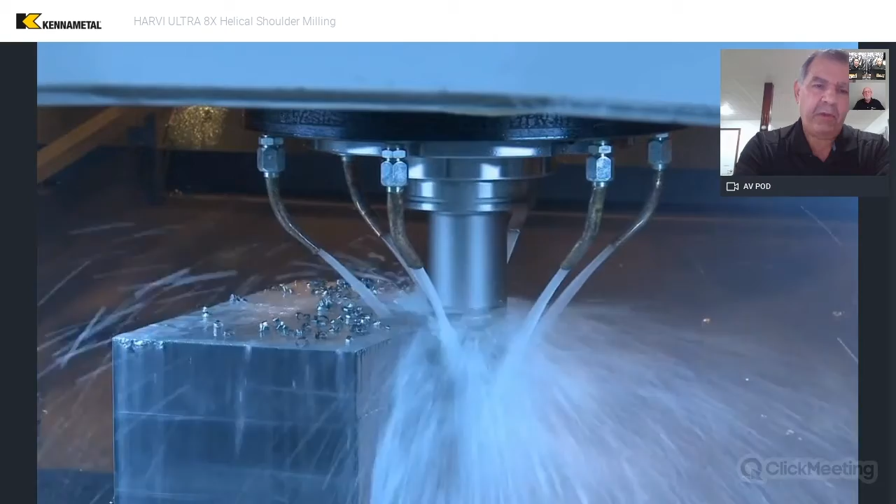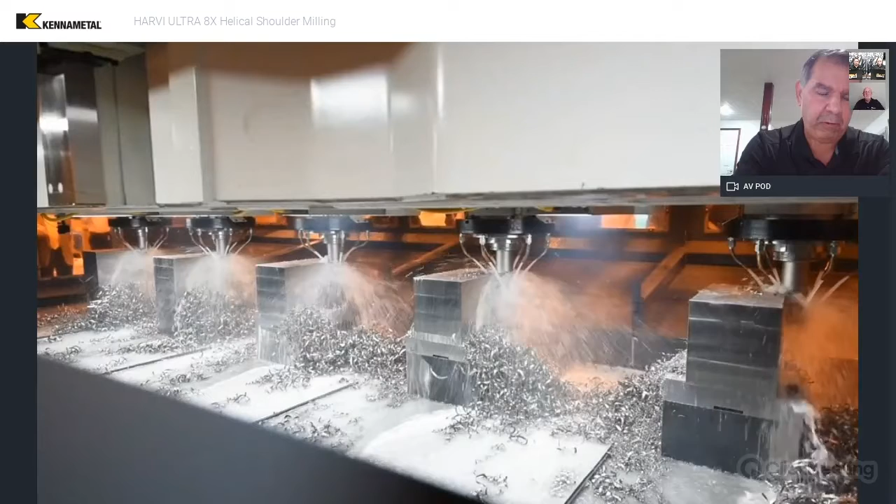Sure. Well, if you think about it, it wasn't very long ago that aerospace companies, and specifically commercial aircraft manufacturers, needed to make a lot of planes, a lot of parts. And the request came in to help them achieve higher metal removal rates with increased cutting tool life for these particular applications, specifically airframe components, aerospace structural components. Kennametal has had helical cutters in the past that have worked very well in this area. So we had the opportunity to look at what we had to offer, and then we looked at whether we want to use that and update or modify something like that, or take a step back and come up with a brand new solution. So there was a set of parameters out there as far as tool life goes, as far as metal removal rate goes, for that. We'll talk a little bit more about that after the video.

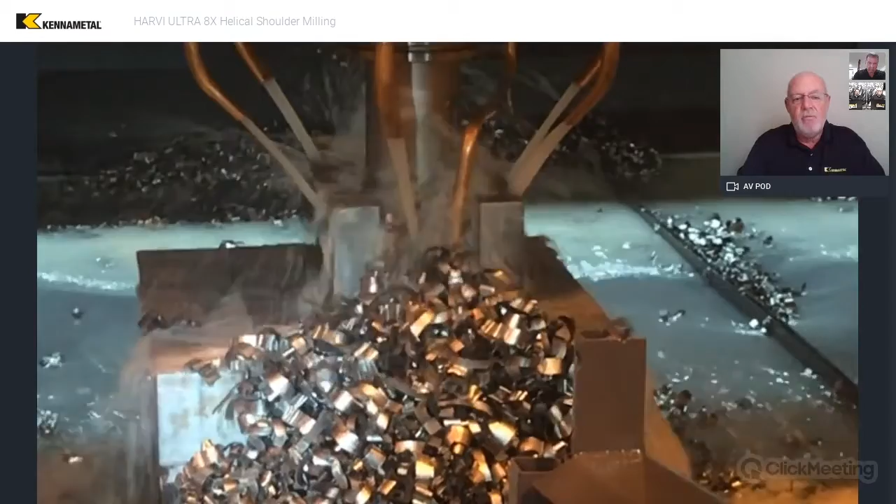And what everybody's seeing here is just a slotting operation with a 3-inch diameter HARVI Ultra 8X tool, taking a 3-inch deep cut. So it's a square cut, 3x3.

That shows about 39 cubic inches a minute of metal removal. As you can see, those chips are very big, and we had to have a tool that would actually be able to handle that kind of an operation.

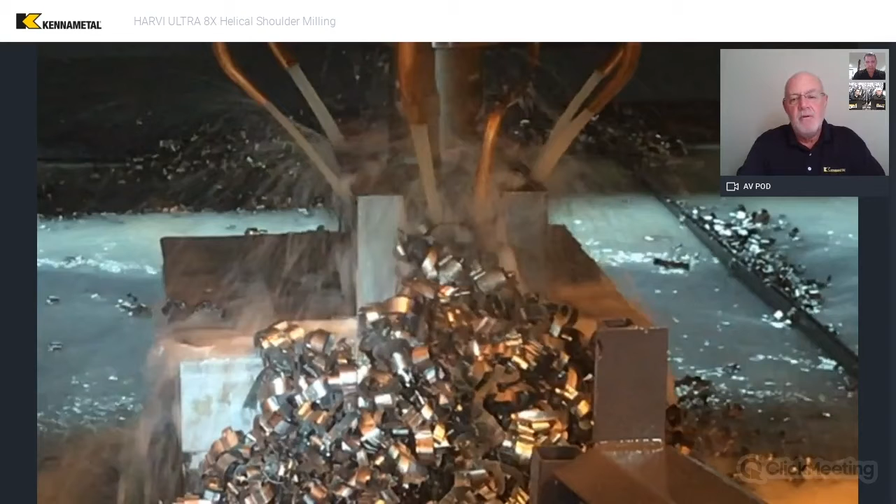That's a great cut, Mark. It looks like a conveyor belt of chips coming out the back. I never get tired of watching this. It's great. I don't either.

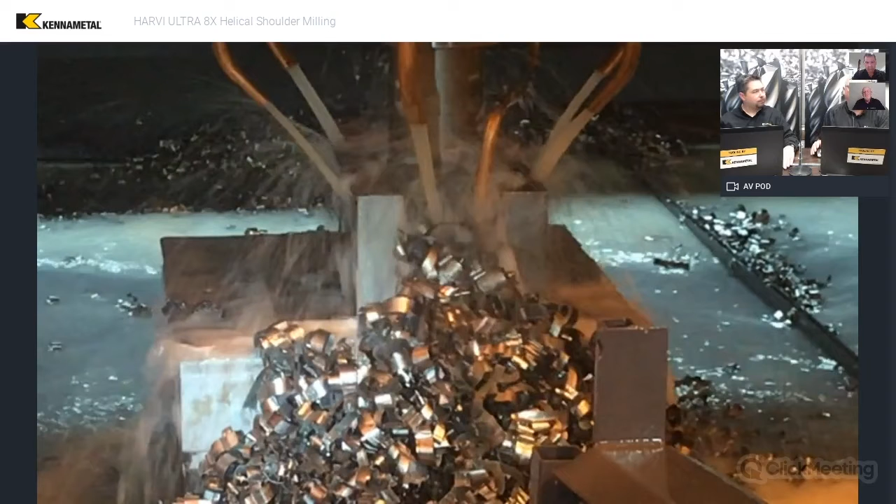I think you guys can maybe talk a little bit more about the background of this, how this tool came about. The challenge that was given to us by the industry was developing a tool that would help the aerospace industry meet the demands they were faced with at the time. They couldn't make parts fast enough, and it was either buy more machines or figure out a way to make the parts faster. So they came to us asking for help to solve that. So if you guys can talk about that challenge and how it was presented to us, and how we got started answering it.

Sure. The tool in front of you was a result of the challenge, and that was the HARVI Ultra 8X that we showed there very quickly. But this all started with getting higher metal removal rates and more tool life out of these types of tools, in these types of applications going forward.

As I mentioned earlier, we could have taken some of our existing tools and tried to modify them to meet the expectations. But the team got together as we rolled through this and said, hey, look, we can definitely meet the challenge, but let's not stop there. Let's see if we can exceed that challenge. So we started from the ground up, and what we're going to do as we go through this presentation is talk about some of the small details that were incorporated in the design of the HARVI Ultra 8X to give us the tool it is today.

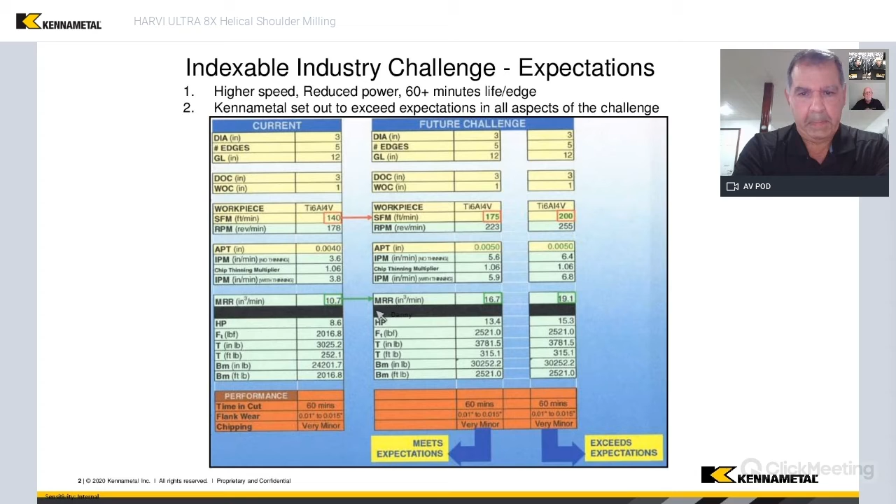The one thing I see on this slide, Tim, is just how far you guys were able to take this. On the left-hand side, the current conditions with our customers were generally running around 140 SFM. The other thing that stands out is the 10.7 cubic inches of material being removed. You were asked if you could get up to 175 and 16 cubes, but you exceeded their expectations, and we're consistently running at 200 SFM and nearly doubling the metal removal rate in cubic inches of material from what they were doing before.

And I think that's phenomenal. It's a big jump from where they were previously.

Danny, you hit a really good point there, going from the slower surface footage all the way up to 200. What that also does is give the ability to reach that metal removal rate without ever changing the chip load. Think about that for a minute. That really saves a lot of stress on the machine, on the fixture, even on the tool. So you're making sure all the rest of your capital expenditures are taken care of while you're still increasing your metal removal rates, your productivity, and, by the way, doing it with less cost per edge.

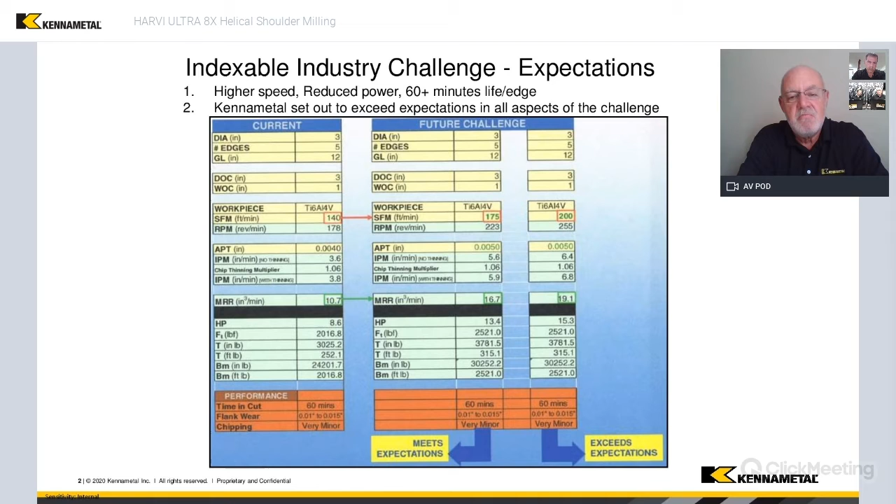Yeah, and the other thing I noticed here is you did that without sacrificing any tool life, which is amazing. Exactly. You look at the bottom, we still have 60 minutes of in-cut time on each one of those. And we know, I've seen these tools in action myself, working with you, Mark, on some of the projects we've done in the past.

And I've seen a lot more than 60 minutes. We've got 90 minutes, 120 minutes tool life with no issues at all. So the fact that you're able to run it at these higher metal removal rates and not sacrifice tool life, which is typically what happens. Usually you start pushing a cutter harder, especially when you start going up in SFM and generating more heat, it seems to usually be more detrimental to tool life, and you see tool life going down as metal removal rate goes up. And with this tool, you guys were able to do both, which is really amazing.

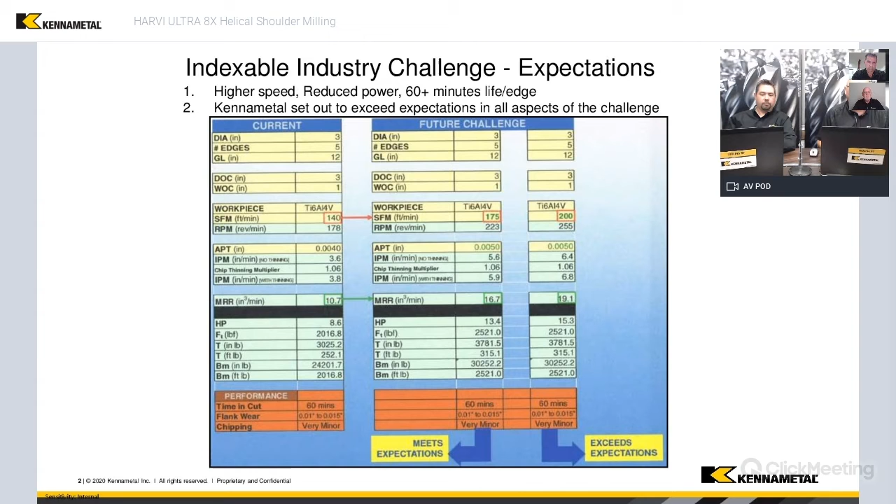So good combination. Maybe talk a little bit about some of the attributes of the cutter, and maybe we'll go into more detail later, but just some of the high points, I guess. Yeah, absolutely. Like I said, there's a lot of details that went in. Some of them are small, but they are very, very important.

We mentioned about the grade, the KCSM 40 grade. It was actually launched in the marketplace before the HARVI Ultra 8X tool was developed, but it was a marriage made for this tool, and that allows us to run those higher speeds we were talking about and get that higher tool life. So in combination with the design of the tool and the KCSM 40, it was a win-win situation there.

The other thing about this tool, if people have taken notice, is it has 8 cutting edges. The inserts themselves have 8 cutting edges. Most of the tools in the market today only have 4. Now, 8 cutting edges, that's not new on an insert. There's a lot of inserts with 8 cutting edges, but it's new for a helical, right?

So as you can see, it's also a negative insert. And during the development, we actually found that even though it was a negative insert, it created less cutting forces than the positive insert, right? So trying to figure that out. What happened there? How is that possible? And I think it comes down to the placement of the inserts and also the edge prep. We'll talk more about that in a little bit later slide. Yeah, because that's not typical when you have a negative insert like that to get less cutting forces. So I think that's very unique.

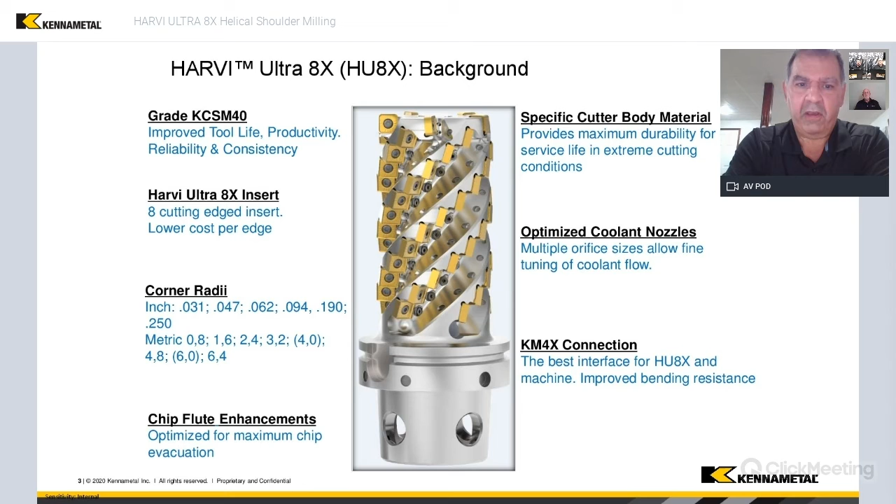Yeah, I think that's a really good overview. Let's jump forward and talk a little bit about the back end, the BTF46 connection. Sure.

One of the things we wanted to see in this test, this was during our testing phase, and we wanted to make some thin pockets with deep cuts. So the square pocket actually comes out to a 1/4 inch thick area on the very outside, the OD of the pocket, and we wanted to measure the taper. We wanted to make sure that these tools were performing in the best possible way. We don't want to have taper in the pocket. That's not really what the final process needs to be.

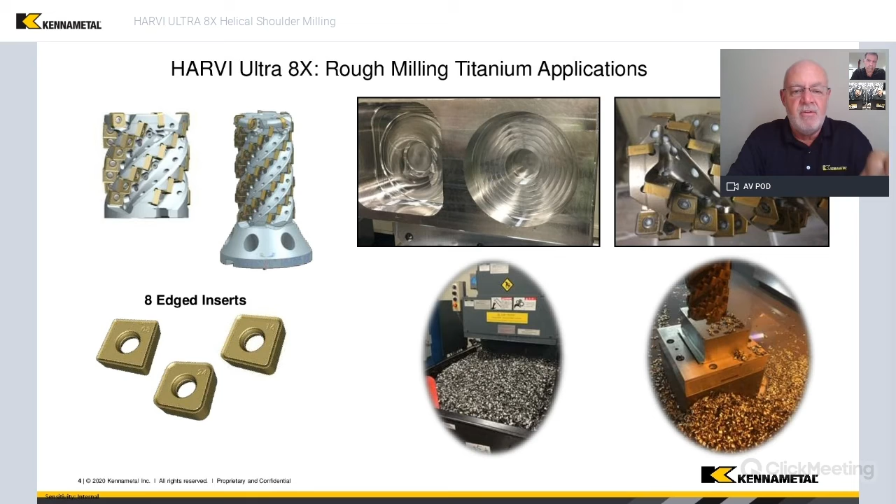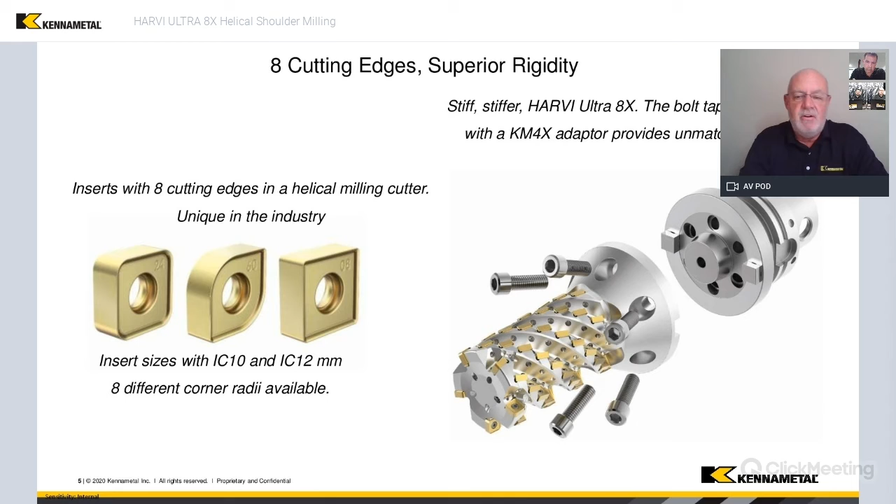So what we've basically done is we've taken an integral shank tool and made it into an interchangeable back end tool, so we could take what you see there, KM4X back end, and if we had a machine down on the shop floor that had an HSK 125 or a CV50 or whatever, that same back end, except with a different taper, could be put on this same tool.

I like that, that can be very useful, I can see, for a customer to be able to use his tooling on multiple setups.

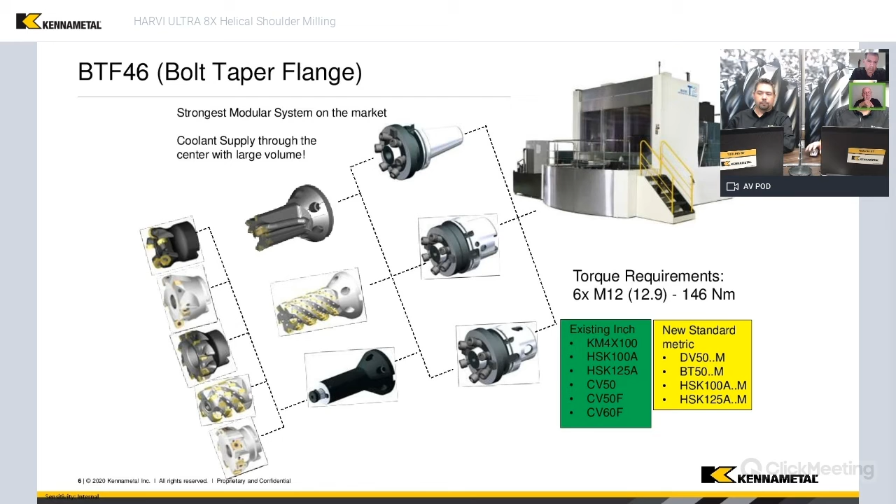Maybe go into a little bit about the shell mill adapters and extensions, because that's pretty important too for a shop. It is, and we offer the HARVI Ultra 8X in a shell mill style, both inch and metric. The adapter or extension uses a standard pilot, so not only can you attach or use the HARVI Ultra 8X on that extension, you can put any standard face mill as long as the pilot matches up. For example, from the Kennametal portfolio, we could use a 7792 high feed cutter, or a round insert cutter like the daisy cutter, which adds more flexibility and versatility to the machines.

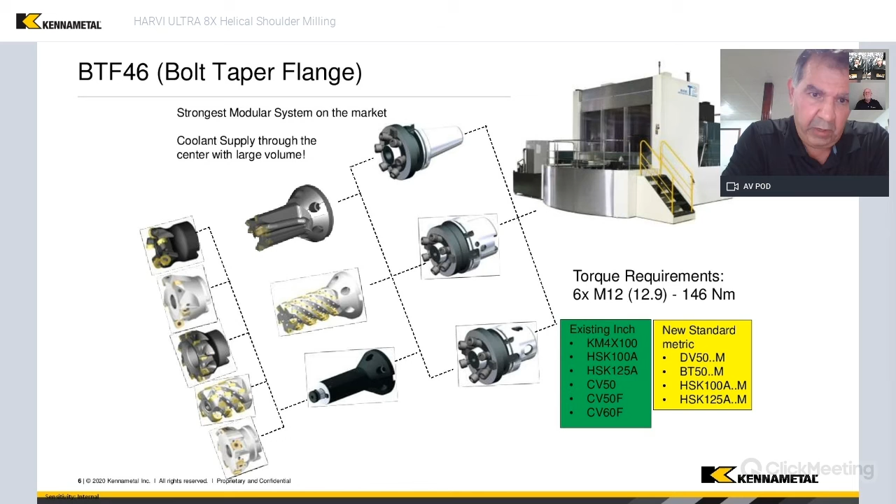Oh, that's good stuff. Yeah, awesome.

One of the things we mentioned earlier was we looked at making these tools very adept at titanium machining. Typically the big users is 6AL4V, but there are other alloys out there like 5553 shown here, or 1023, which is not as easy as 64 either. This is just a little indication of what we can do with this tool. This is a 3x7 tool, and we actually took a 7-inch length of cut with it.

We were running on 5553, typically a typical carbide would run at 70 or 75 surface feet. These we ran up to 95 surface feet, and the chip load was over 4 thou. And we still got, if you look at bullet number 4, the customer, after we got done testing and making sure these tools were working as advertised, actually set his index at 120 minutes per cutting edge. That means they could move 3 full parts with 1 edge, which boils down to 24 parts total before they had to change an insert. That's economy of scale there for sure.

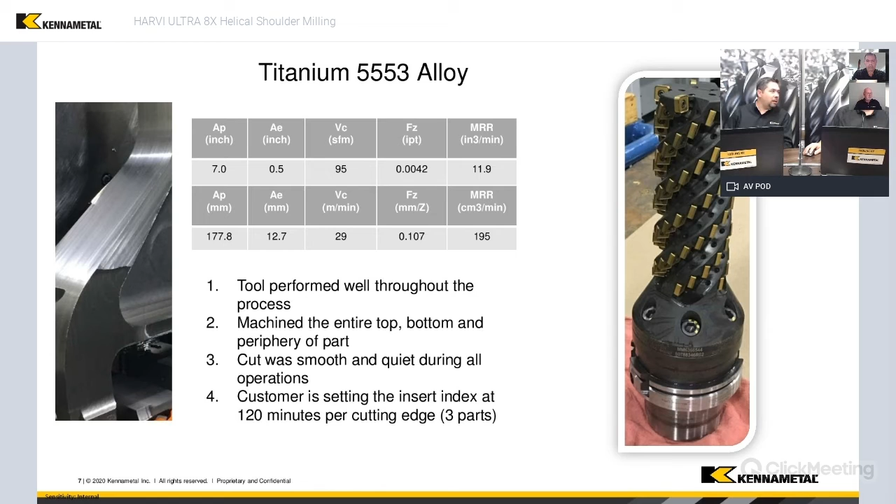As machining guys, we think a lot about power of course, machining power, and it's not everything, right? But we know there's a huge correlation between power consumed, heat generation, and directly forces on the tool, in this case forces on the insert. So we know there's a big improvement with this tool, and a lot of it comes from the insert geometry, and some of the things that have been done in the insert. Maybe you can talk to us about that a little bit.

Thanks, Steve, and you're exactly right. There was a lot of time and effort put into developing the insert to go with the HARVI Ultra 8X to hit those objectives that we wanted. If you take a look at this slide, it gives you a little bit of detail about the insert, things like the edge prep. On the far left, where the 2 yellow images are, the image on the right is the actual edge of the HARVI Ultra 8X insert today. We have that land on there for a reason - it's there to give the edge stability, edge integrity, and edge strength in these very aggressive cutting conditions.

You'll notice if you picked it up, most if not all the examples we showed have a feed rate of over .004, and that's to get over that land. This being a negative tool, if we don't get over that land and we're hanging out there 7 inches with a very small feed rate, it's going to compound that because it's a negative on a negative, so the cutting force will actually go up. So it's beneficial to feed it heavier to reduce the cutting forces and get into the positive top rake of the insert.

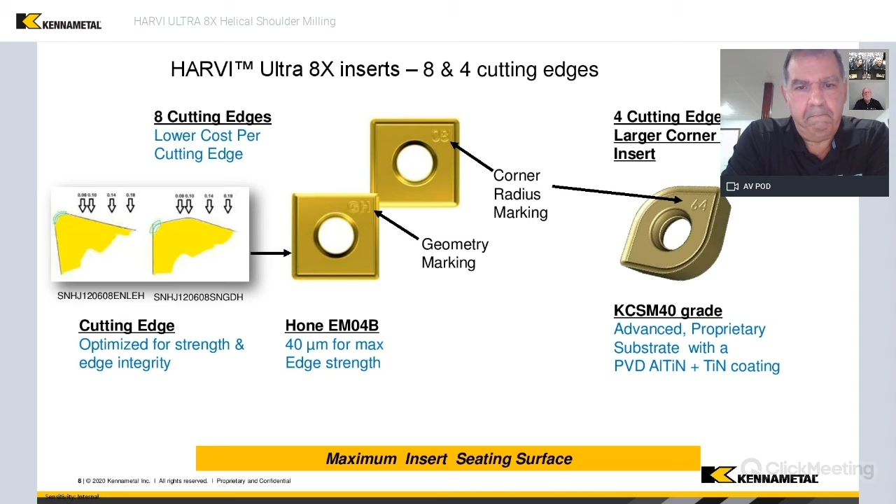I think the edge geometry you're talking about in this slide is very important because it really shows the versatility of this cutter, and that it's not only versatile in different materials, but versatile in the type of machine tool we can use for it. We've talked about this before, that not everybody has a T1, T2 type machine, a Makino.

So for those customers that may have a lighter duty machine or a smaller machine, these tools with just the edge radius on them, without the T-land, could reduce the forces down enough that they could take a shell mill and still get some real good benefit out of this cutter.

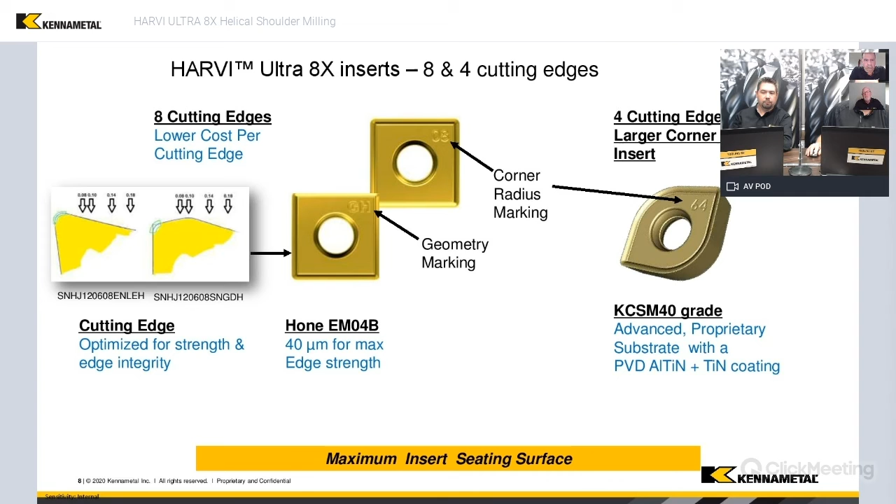Exactly. So we saw the video earlier of the HARVI Ultra 8X doing a 3x3 full slot, and we talked a little bit earlier about the coolant flow. Maybe we could talk about the coolant nozzles. I know Mark gave us a video to show, so I'm going to pull that up and let you talk through it.

This is very interesting to me. What you're going to see here is we introduced a coolant nozzle structure, especially to our helicals, where there's a lot of chip removal problems trying to get the chips out of the flute before they get caught back up in it. This is what you're seeing without the nozzles, at 200 psi. It really isn't that great of a coolant flow and pressure, so that doesn't help us too good getting chips out quickly.

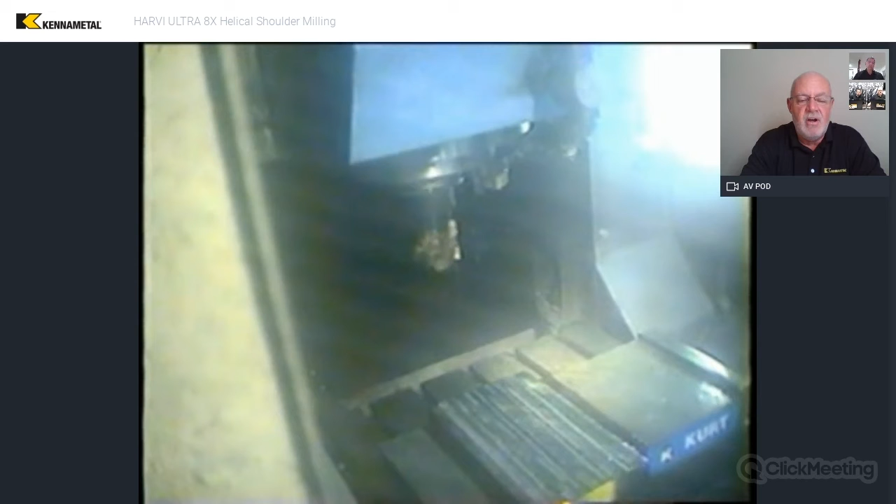So with the coolant nozzles in, Danny's going to show the video and it's going to look a whole lot different. It's the same cutter, except instead of just coolant holes, these are coolant nozzles. You can see there's a huge difference in the way the coolant reacts with these nozzles. We've been using nozzles since we developed these many years ago, so that there's less of a chance of having any problems with chips getting stuck in the flutes, and we've been very successful with that.

There are some other fun little facts I can tell you guys as we go into the rest of the presentation. The good thing about the coolant nozzles is they are interchangeable. If you have a specific type of pump pressure and pump flow, we can custom tailor the tool to the right size nozzle, and that gets you the best coolant pressure for your situation. It really does make a big difference, I'll tell you.

Yeah, that's definitely really neat. We talk about tunable tools, and a lot of times we're talking about vibration and things like that, but to jump into this type of tuning, where you can take into account the pump of the machine, the capability of the machine, and directly change those - every situation is different, and you have to be able to handle the situation that comes up. I think for the coolant at least, this is one good way of helping that situation out.

Just think back to the video we showed about slotting. If you compared the no-nozzle coolant flow versus the nozzle coolant flow on a 3x3 slot, you've got to get the chips out of there, and the higher the pressure, the better your options are going to be to get those out of there, especially vertically. So it's a key feature for the specific application - having the pressure there to drive those chips out is just a win for the HARVI Ultra 8X.

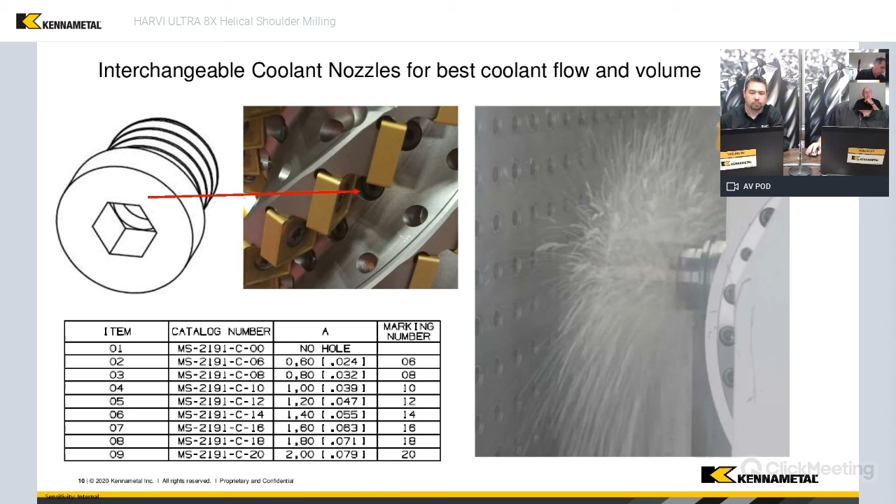It sure is. We've talked about the coolant nozzles, we've talked about the inserts, we've talked about the back end. I think one thing we really haven't spent a lot of time on is the cutter body itself, as far as how important the geometry was on it, and what engineering went into the cutter body itself. So if you can maybe talk a little bit more about that, Mark, I think that would be good as well. I will certainly do that.

One of the important things we have at our disposal, and it's a very cool thing, is the ability to do FEAs, finite element analysis. And what that helps us do is put the cutting forces in place on all the inserts, and allow us to look at the stresses and the fatigue involved in each little machined area of the part. So it surely helped us design and ultimately make the tools with the least amount of stress designed into them, so there was less fatigue and more life we can get out of them without the fear of breaking it.

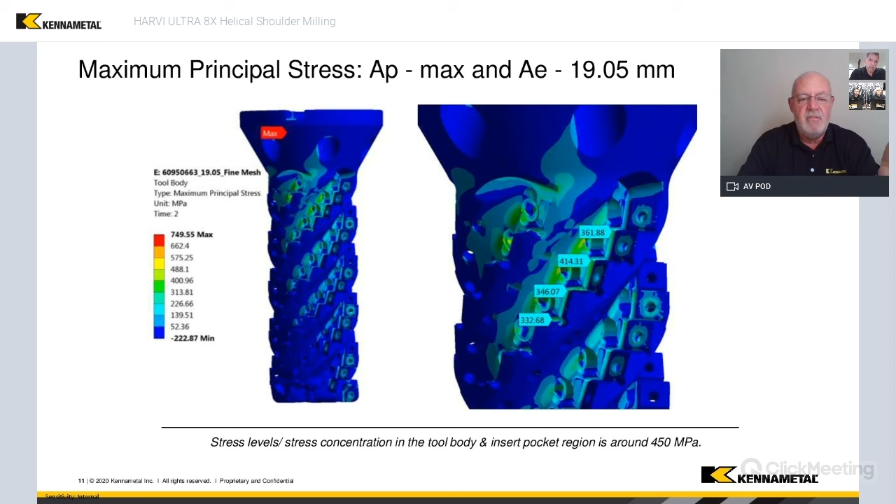The other thing we looked at, not only the FEA, but the underlying material had to be right too. So we looked at many different steels, and with the help of our metallurgists, we came up with one that is very structurally sound, I'll say, and it's very inclusion free, so it's clean. Without inclusions, you have a lot less opportunity to find a place inside the material that's going to have a stress riser or a fatigue point. And therefore, the combination of the FEAs and using a very good steel for the body, we have a tool here that is pretty much second to none in strength for the amount of work it can do.

And one little fun story is the FEA even helped us design the coolant holes better and make them stronger, just because we could change the shape a little bit or do whatever, and it actually helped us move the stresses around to a place where they were less likely to cause a problem. So it really is a cool thing.

Yeah, it's amazing what we can learn from the FEA analysis and use it as a tool to improve the cutter bodies, but also the insert geometries and things like that, to develop more favorable chip formations. So it's a great tool, and I think it's interesting to me to see all the engineering that went into this cutter from top to bottom. This was, in my eyes, the most engineered indexable tool I've ever seen. It really had a lot of thought put into it.

And I know the engineering on this spanned over a couple of years, didn't it, Mark? 18 months or so, between getting the final designs done and tested and tested again, and then taken out to some customers and retested. So yeah, I think Tim said 18 months. That's about where I think we are. Yeah, I would say a minimum of 18 months.

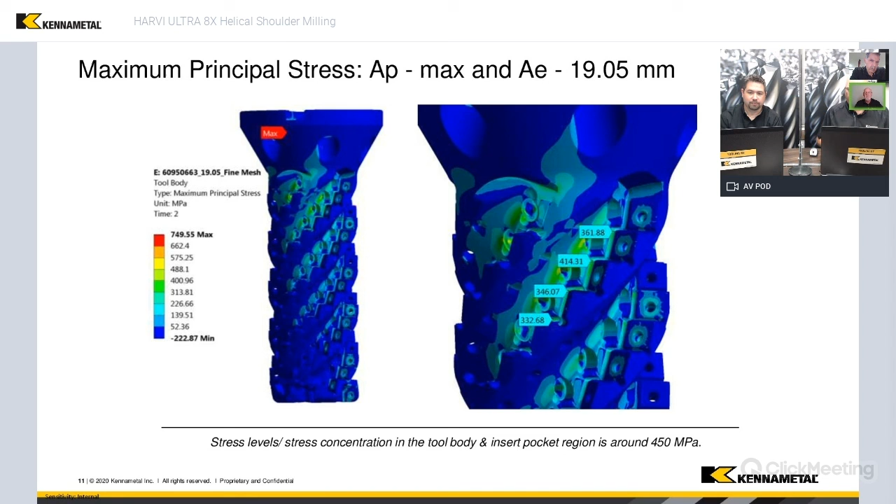Well, it was a lot of fun developing it and testing it and bringing it out to the world. It was definitely one of my favorite things I've ever done with Kennametal, and I'm continuing to do that. If anybody out there needs some help in application, Tim and I are both here for helping that situation.

We talked a lot about the engineering and the amount of work and testing we put into this, and that was all done for a reason - to exceed the goals we started with at the beginning of this presentation, and we more than did that. That hard work of the whole team over 18 months of failure, then redesign and remake, has done a fabulous job providing a tool to do exactly what we said it was going to do. I can't be more happy or proud of any tool in my portfolio for shoulder milling than HARVI Ultra 8X.

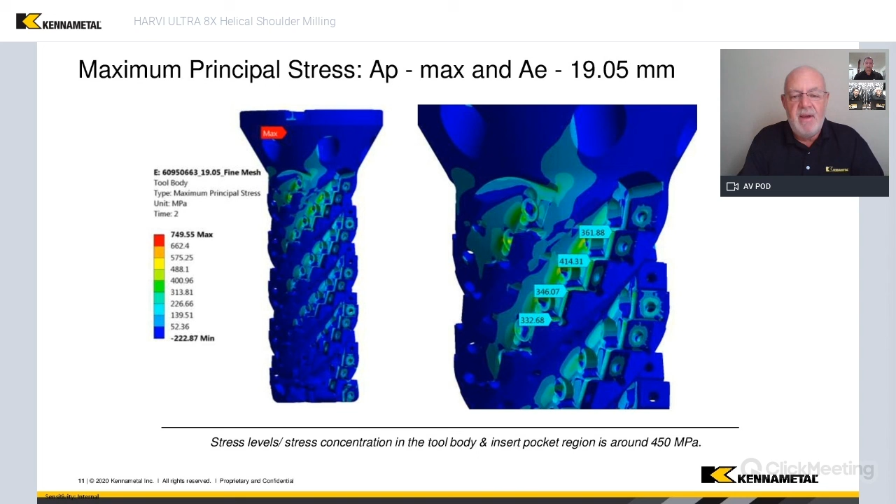I agree. I'm gonna end this with a quick story I always like to tell about this tool. During our testing, we wanted to make a strong tool that wasn't gonna break off in the middle of a cut - that's never a good situation. We tried to break this tool in testing. We tried everything to make it crash or fail - every kind of cut you shouldn't ever do in a shop - and it never failed. It never packed a chip, we never broke one, we never even broke an insert. I felt really confident taking this out to the world, knowing that even though no shop would want to try to break a tool, mistakes happen, so we made sure every possible testing scenario was done so we could be comfortable putting this out into the public world.

Great comments, and congratulations to the whole team behind this. It's really good work, exciting to see. We're guys that like seeing big chips, big cuts - it's fun. We've all been in this business a long time, and you're always trying to top what you've seen before, what you've done before, and things like this really let you do that and give you that satisfaction. Excellent job, guys, great presentation.